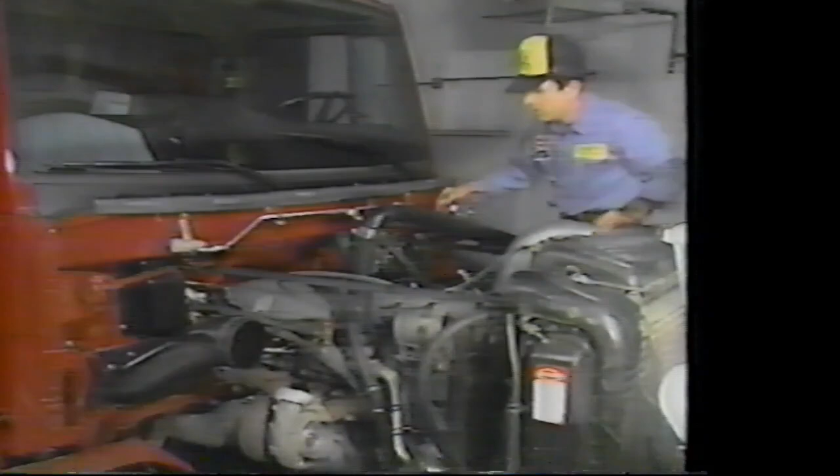Be sure you have the correct model Jake brake, Model 760. The serial number is located on top of each housing. Also be sure you have the following special tools: a 15mm 12-point socket wrench, a 12mm 12-point socket wrench, a 3/16-inch hex key socket wrench, an expander tool, Kent-Moore part number J37347, and an injector height gauge, Kent-Moore part number J35637.

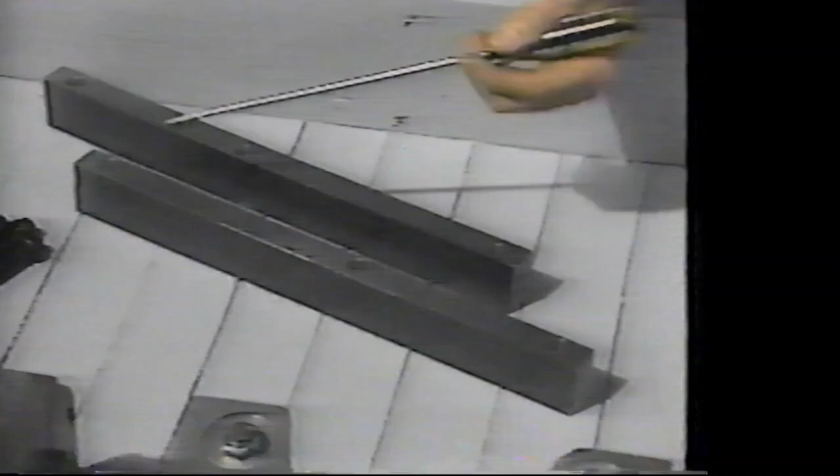You also need the Jacobs installation kit. Parts included in this kit are 3 housings, support bars, cap screws, clutch switch, dash control, module and harnesses, plus the customer information group and Model 760 Jake brake installation manual, and the Detroit Diesel Series 60 engine service manual.

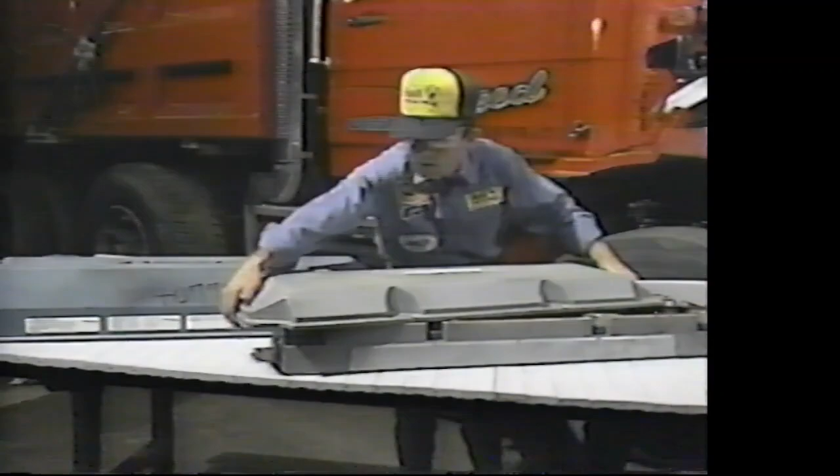There are 3 styles of valve covers for the Series 60 engine: the current aluminum style 2-piece valve cover, the earlier aluminum style 2-piece valve cover, and the fiberglass 1-piece valve cover. However, the aluminum style 2-piece valve cover cap may require modification at the breather pipe location inside for the Jake brake housing clearance. We will refer to this modification at the end of the installation of the engine brake.

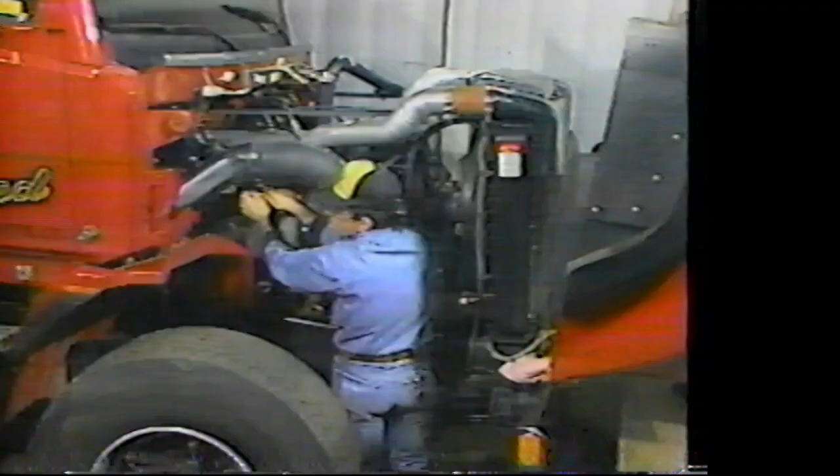All Detroit Diesel Series 60 12.7-liter engines with serial number 6R4455 or higher are Jake brake ready. For engines with serial numbers lower than 6R4455, you need a non-Jake ready engine brake kit. This will be covered towards the end of this program.

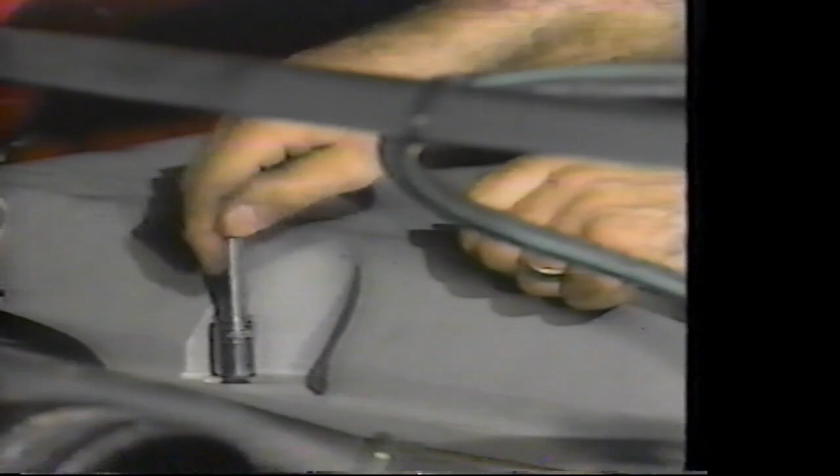Now let's turn to engine preparation. First, steam clean the engine and remove the engine parts necessary for access to the engine overhead. Now remove the valve cover cap. The cover cap on this engine is aluminum, so you do not have to remove the cover base. But for the purpose of this demonstration, we have removed it for better visibility.

On the Jake ready engines, it's not necessary to readjust the engine overhead. The purpose for showing the Detroit Diesel Series 60 valve and injector adjustments is to inform mechanics not familiar with the Series 60 engine, and to have this procedure shown before the Model 760 Jake brake housings are installed on the engine. For non-Jake ready engines, it's necessary to readjust the overhead, as new engine components will be required. The component changes necessary will be covered at the end of this program.

The next section covers valve clearance and injector height adjustments. Accurate adjustment of the clearance between the valve buttons at the end of the rocker arm and the tip of the intake and exhaust valves is important to maximize Jake brake performance and economical engine operation. Likewise, injector height should be measured and adjusted if necessary. Intake and exhaust valve clearance is adjusted by means of an adjusting set screw and lock nut located beneath the valve at the end of the rocker arm.

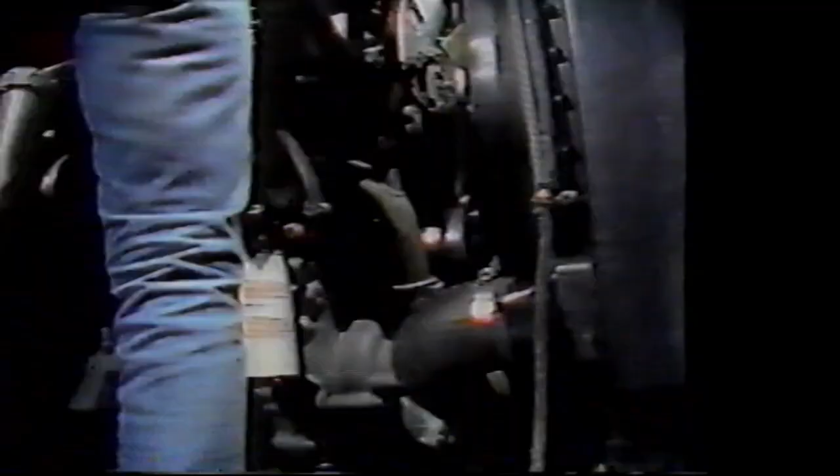To adjust fuel injector height, use the Kent-Moore injector height gauge, part number J35637. Note the gauge hole in the fuel injector body. In the method we will now show, you will have to bar the engine over only 2 complete revolutions. You will adjust 3 cylinders, either valves or injectors, on each revolution. Be sure to first disconnect the starting power for the engine. Do this by removing a battery cable. Do not simply rely on turning off the ignition.

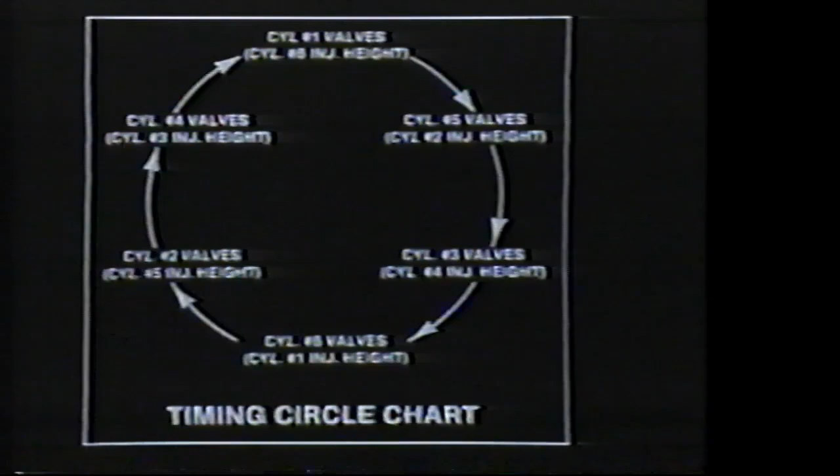First, let's summarize the steps, then we'll take it step by step. You will be using this timing circle chart as a guide. It's shown in the installation manual. Always bar the engine over in the direction of rotation, stopping when one of the fuel injectors has just begun its downward stroke. Note the number of this cylinder and refer to the timing circle chart. You can start the adjusting with any cylinder, but be sure to complete the circle.

Adjust all 4 valves, 2 intake and 2 exhaust, at this cylinder position and set the fuel injector height on the companion cylinder. Never set the valves and injector of the same cylinder at the same time. Continue around the circle until all 6 sets of valves and fuel injectors have been adjusted.

Here's the process step by step. To adjust the intake valves, insert a 0.008 feeler gauge between the tip of the valve stem and the valve button at the end of the rocker arm. Loosen the lock nut and turn the adjusting screw until the feeler gauge produces an even or smooth pull between the valve stem and the valve button.

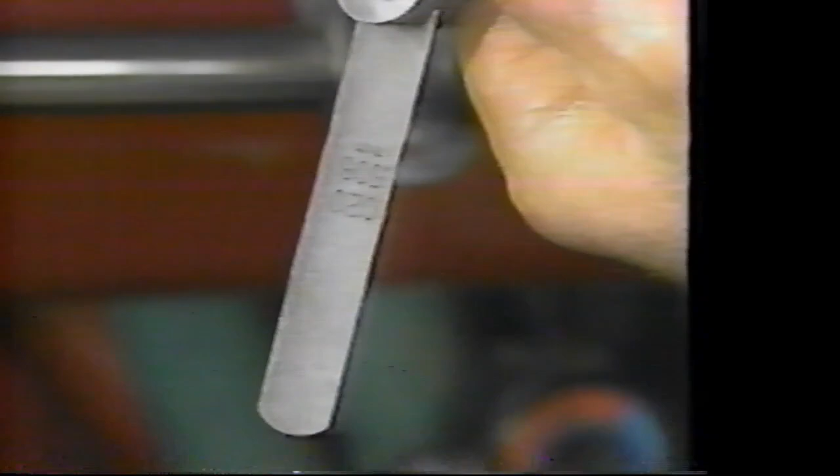Torque the lock nut to 35 foot-pounds. Remove the feeler gauge, then reinsert it to be sure the adjustment did not change when you tightened the lock nut. Readjust the gap if necessary. Adjust the 2 exhaust valves the same way, but use a 0.020 feeler gauge.

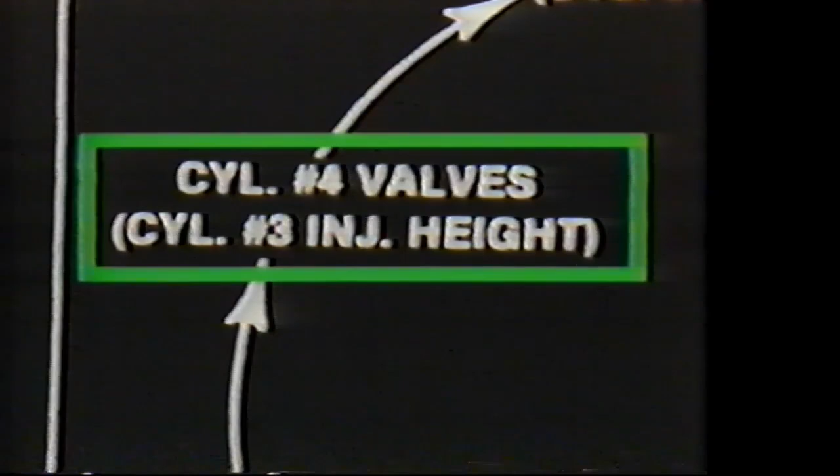Now refer to the timing circle chart. Find the cylinder number for which you just adjusted the valves. The number in parentheses directly below is the cylinder for which you now adjust the fuel injector height. In this demonstration, cylinder number 4 was just adjusted. The chart says to now adjust the fuel injector height for cylinder number 3.

Place the tip of the height gauge in the hole in the fuel injector body with the flat of the gauge towards the fuel injector plunger. Be sure the height gauge seats on the machined surface with the tip in the gauge hole. Dirt or other foreign material in the hole or on the machined surface may prevent accurate setting of the injector height. Loosen the fuel injector rocker arm lock nut.

Then turn the adjusting set screw until the flag of the gauge, that is the extended part of the gauge, will just pass over the top of the injector follower. You will develop an accurate feel for this, and your objective is to adjust all 6 injectors to the same feel. Torque the lock nut to 35 foot-pounds. Then recheck the adjustment with the height gauge and readjust as necessary.

Now bar the engine over until the injector in the next cylinder in the timing circle chart begins its downward movement. Repeat the adjusting process starting with the valves, continuing until you have adjusted all the valves and fuel injectors. To check tolerances, consult the component checking dimension and setting chart in the manual. Now let's return to the steps for installation of the Jake brake.

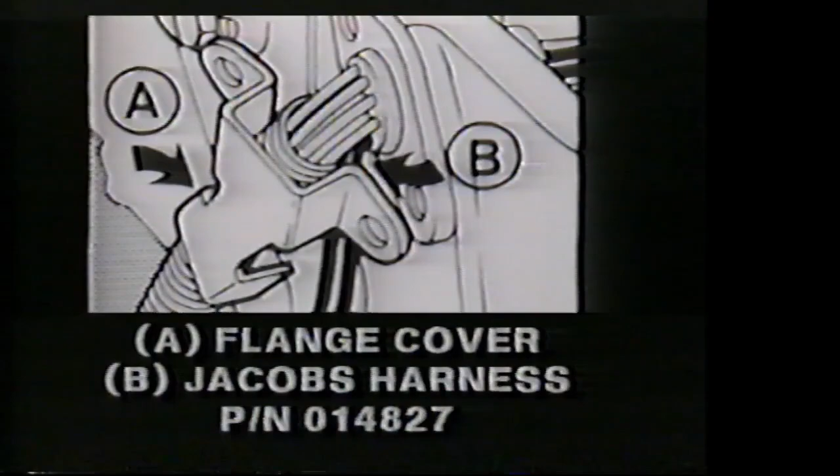Before the support bars and engine brake housings can be installed, the under valve cover wiring harness must be installed first. Remove the mounting flange cover for the electronic unit injector harness. Insert the blue wire and the yellow wire through 2 of the access holes in the grommet located at the rear of the cylinder head. Caution, use care. Once these wires are inserted through the grommet, they cannot be removed because of the terminal locking tangs. So remember to do it right the first time.

Lay the harness alongside the injector wire harness. Pick up the end connector on the outboard side of the standoff at the rear of the cylinder head. Note, however, that if the harness for the Jake brake solenoid valves was factory installed by Detroit Diesel, the wires are red rather than yellow, and the harness installation is not necessary.

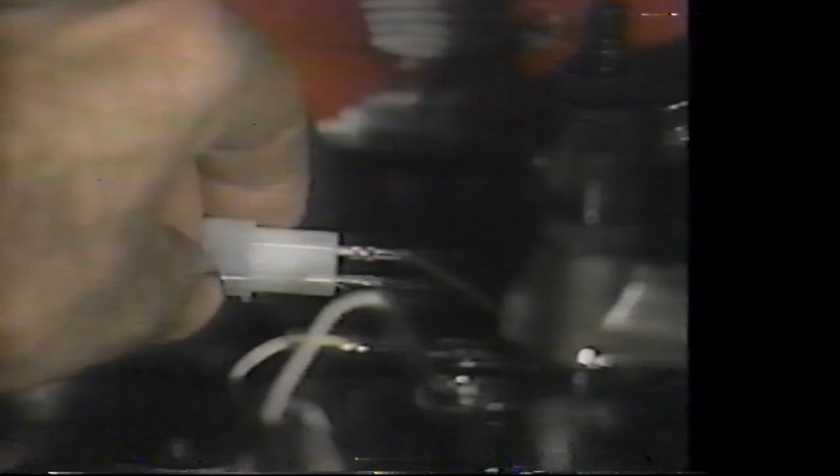Insert the yellow wire from the harness into the pin housing on the same side as the yellow wire on the solenoid harness. Then insert the blue wire into the other hole. Then install the pin housing onto the solenoid harness. It fits onto the connector in only one direction. Push the housing until it clicks. Note the Detroit Diesel factory installed harnesses do not have the pin housing and connector. Caution, the wires must be connected as instructed. If the wires...

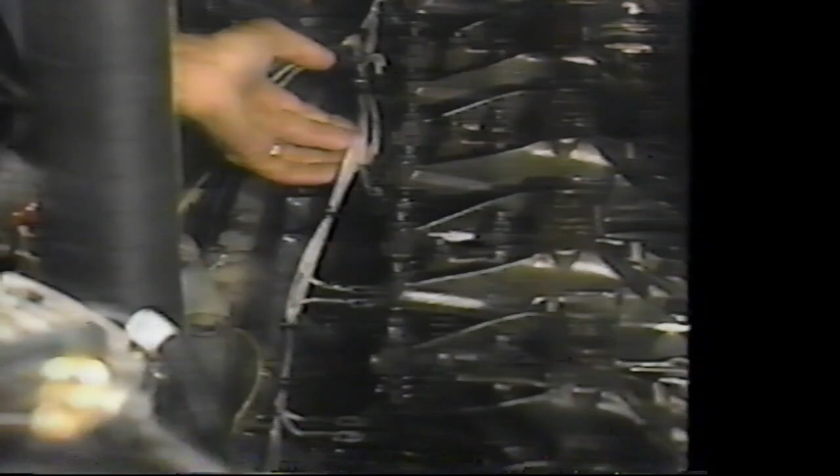Bend all the electrical terminals at the injectors upwards about 90 degrees to provide clearance for the Jake brake housings. Caution, then roll the harness down against the injectors and add loom as needed for support bar installation.

Next, remove the 3 bearing cap bolts on locations 2, 4, and 6. These bolts are not to be used for installing the Jake brake. Discard after removal. Always blow out the oil from the bolt holes, cam bearings, and bosses for the support bars. Please use care when doing this, and remember to be sure to wear eye protection. Warning, eye protection must be worn while blowing the oil. Personal injury may result if safety glasses are not worn.

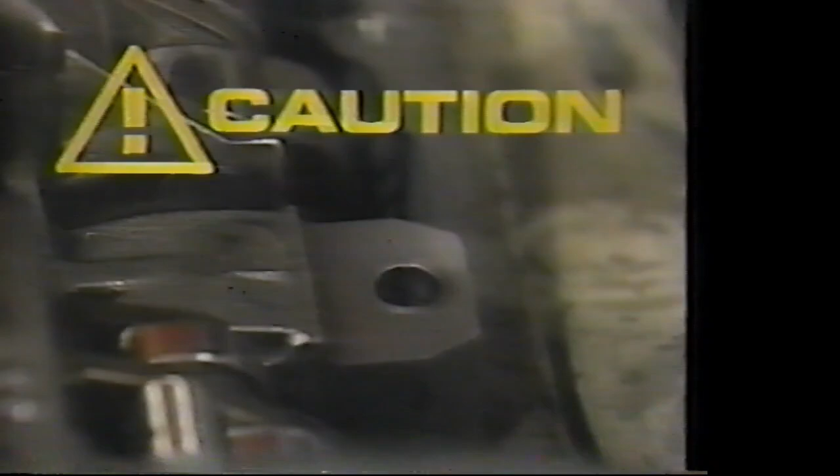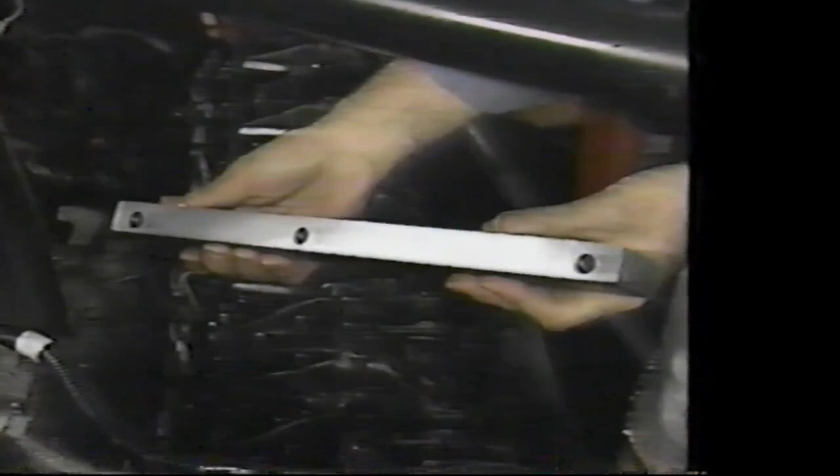Caution, attach a length of tubing to a blowgun nozzle to blow out the oil from the bolt holes. Cover the holes with hand towels to minimize oil spray. Removing the oil from the bolt holes prevents the engine block from cracking when tightening the bolts later. The next step is to install the Jake brake housings, but first you must install the support bars with the out stamp towards the turbocharger side of the engine.

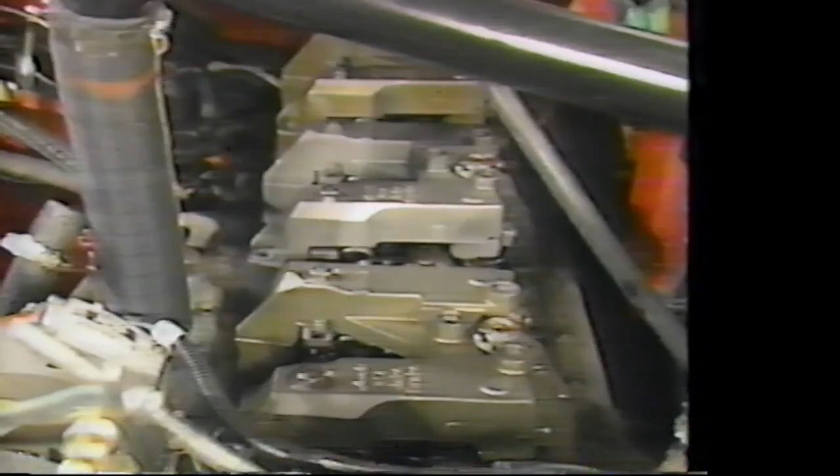Then place the 3 Jake brake housings over the rocker shafts with the solenoid valves towards the camshaft side of the engine. Be sure the housings do not interfere with the wiring harness and align to the support bars. Apply International Compound number 2 to the threads and to the underside of the head of the housing hold-down cap screws.

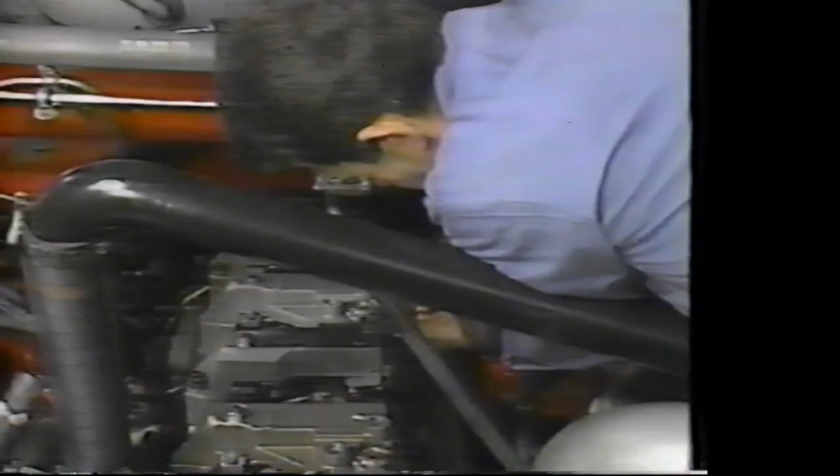Install washers on the 4 3/4 inch long cap screws and insert the screws into the brake housings on the exhaust manifold side. There are 2 such screws per housing. Install a pilot bolt for housing alignment on the camshaft side of the engine.

Next, torque the 6 cap screws on the exhaust manifold side of the engine to 40 foot-pounds and remove the pilot bolt. Then install a washer on the 4 3/8 inch long cap screw and insert it into the brake housing on the camshaft side. There is only 1 such screw per housing.

Tighten the Jake brake hold-down cap screws in the following sequence. Torque the 3 cap screws on the camshaft side of the engine to 40 foot-pounds. Now repeat the torque sequence, but torque all the cap screws to 80 foot-pounds.

The next procedure is adjustment of the slave piston. Caution, the slave piston adjustment procedure must be strictly followed. Failure to use the proper adjustment procedure will result in poor Jake brake performance and/or serious engine damage. You must make the adjustment with the engine stopped and cold. The oil temperature must be 140 degrees Fahrenheit or below.

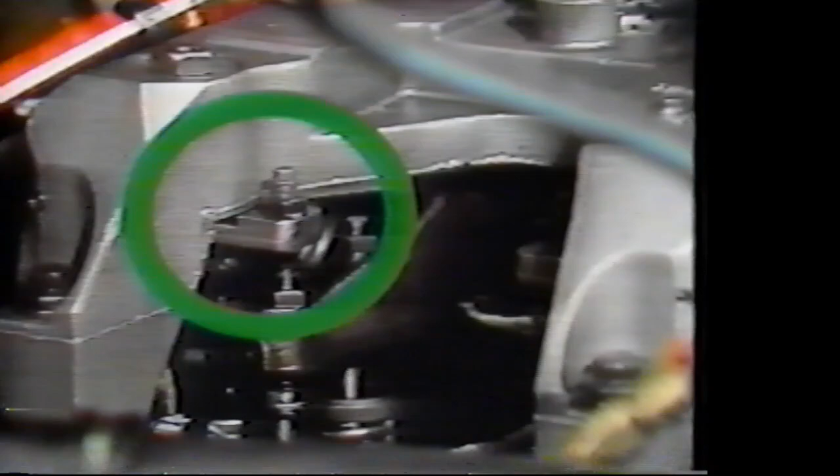Also, the exhaust valves on the cylinder to be adjusted must be in the closed position, that is, with the rocker arm loose. First, note the leveling screw and the crosshead member of the slave piston assembly. Back out the leveling screw until the end of the screw is beneath the surface of the crosshead.

Then place a 20 thousandths feeler gauge between the solid side of the slave piston crosshead, that is, the side without the leveling screw, and the exhaust rocker arm adjusting screw. Now turn the slave piston adjusting screw clockwise until you feel a light drag on the feeler gauge. Holding the screw in this position, torque the lock nut to 25 foot-pounds.

Note that the slave piston adjusting screws are reset screws. You must not disassemble them. For slave piston adjustment on 11.1-liter Detroit diesel engines, refer to the Model 760 installation manual.

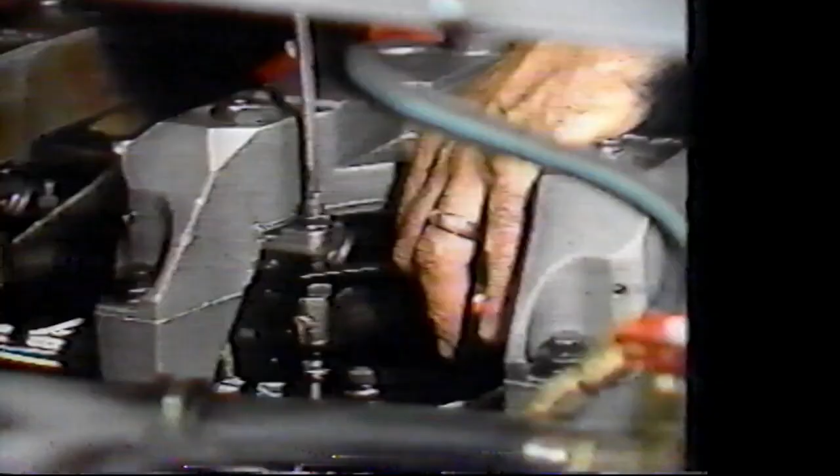Next, follow the same procedure to set a 20 thousandths clearance between the slave piston leveling screw and the rocker arm adjusting screw. As before, torque the lock nut to 25 foot-pounds.

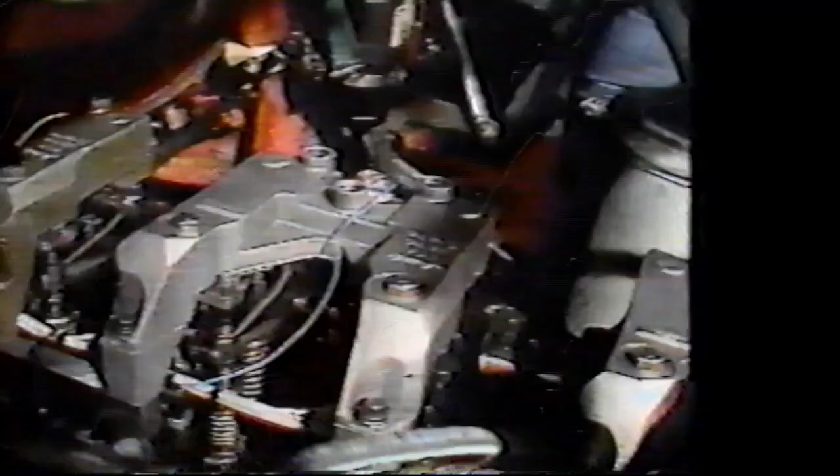Repeat these same steps for the slave piston adjustment on each of the remaining cylinders. Rotate the engine when necessary to put the exhaust valves in the closed position to make the adjustment. The purpose of routing and clipping wires to the support bars is to keep them from rubbing between the support bars and the housing.

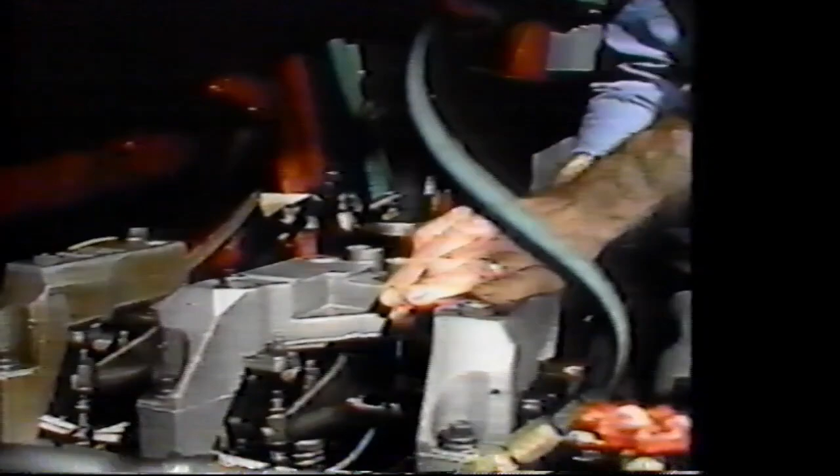Now connect the 3 wires to the solenoid valves as follows. The short yellow wire to the rear housing. The blue wire to the center housing. And the long yellow wire to the front housing. Store any excess wire along the injector wire harness and secure with plastic wire ties.

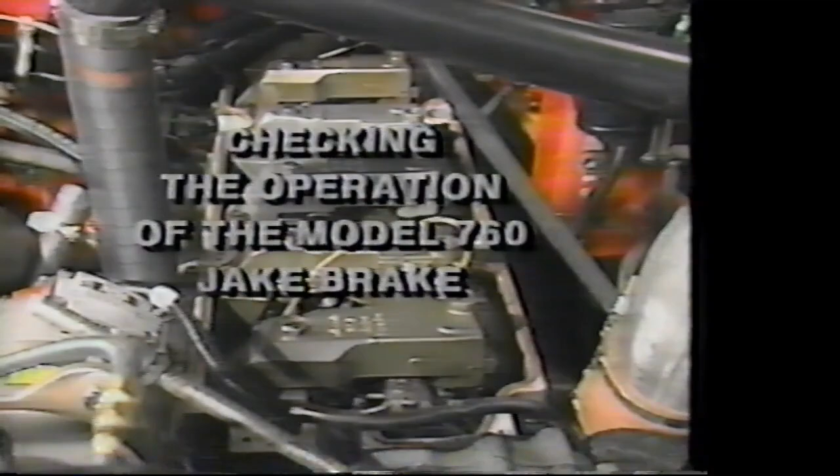The lower cover has been reinstalled for engine brake operation check. The next section of this film shows you how to check the operation of the Model 760 Jake brake. You are again reminded to be careful. Warning, wear eye protection and do not expose your face over the engine area. Take precautions to prevent oil leakage onto the engine.

It is important for you to keep in mind that whenever the engine is running with the valve covers removed, oil splashing in the engine area could cause personal injury. The first step in checking Jake brake operation is to bleed the brake housings. Start the engine and allow it to run for a few minutes. Then depress and release the Jake brake solenoid armature several times to allow the housing to be filled with oil.

Watch the master piston to be sure it is moving down onto the roller in the injector rocker arm. Check each of the 3 Jake brake housings to be sure each is functioning properly. Once you are satisfied, shut down the engine.

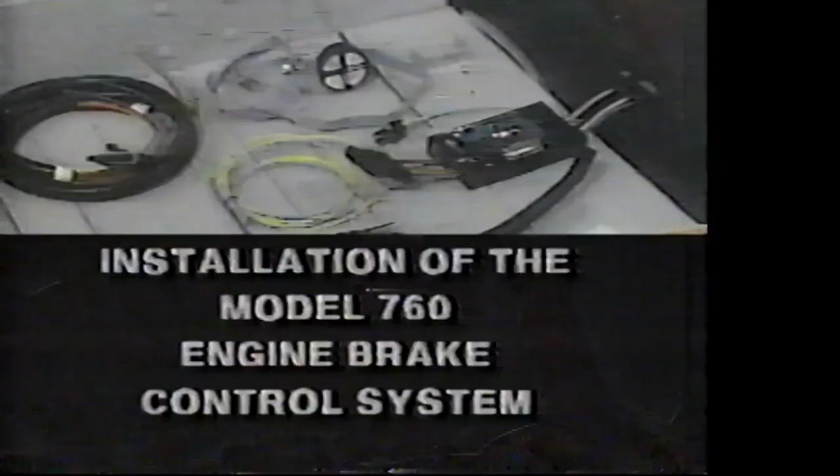The next section of this film shows you how to install the clutch switch. Mount the switch in the most convenient or accessible location possible, which may be under the floor wheel well, in the area of the bell housing, under the dash, or the engine firewall.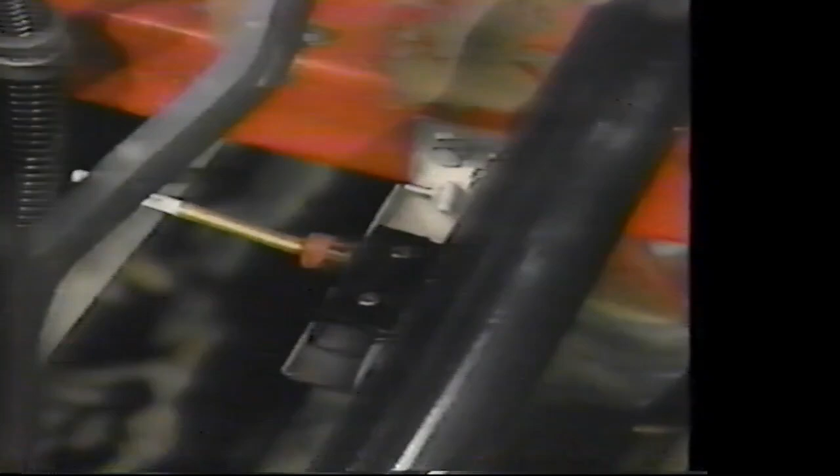After mounting the switch bracket, install the switch with the actuator arm in contact with the clutch pedal arm or other clutch member. Adjust it by moving the switch along the mounting bracket. The tip of the actuator arm should be deflected about 1 to 1.5 inches when the clutch is fully engaged. The switch should click in during the free play motion of the clutch pedal before clutch disengagement occurs.

Here is how you install the dash module. Locate an area on the dash for the dash module and drill a 2-inch hole. Install the module using the bracket and 2 wing nuts. Caution, do not over-tighten the wing nuts. Switch failure will result if you do.

Control module installation. Using 2 self-tapping screws, mount the control module inside the cab so that the ribbon harness will reach the dash module.

Caution, be sure to secure the control module properly. Do not tie wrap the module behind the dash. If you do, the control module will be stressed and failure will result. This control schematic diagram appears in your Model 760 Jake Brake installation manual. Study it as you proceed with the wiring.

If your installation is using the two optional dash switches instead of the dash module, connect them as shown in the wiring diagram in the installation manual. Note that the use of these switches eliminates the diagnostic troubleshooting feature of the standard circuit.

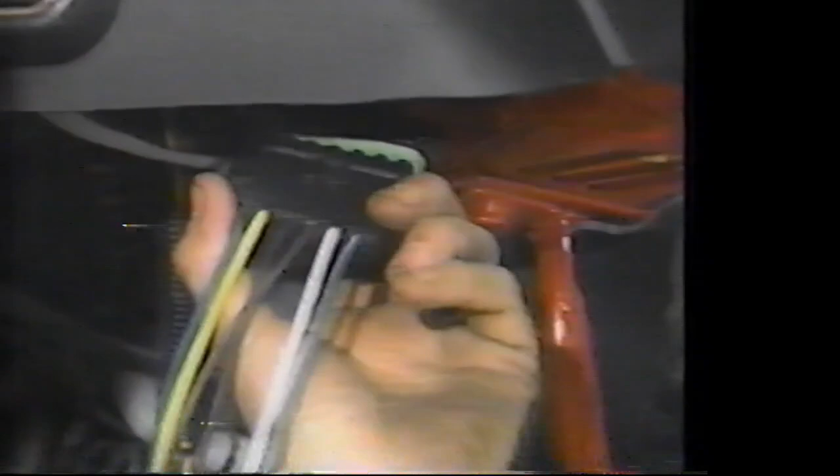Connect the wire harness, part number 015708, to the Weather Pack connector on the control module. Now connect wire harness part number 015709 to the control module. Connect the green wire to a good ground. The green and yellow wire is for possible future use. For now, connect it to the same ground with the green wire.

Warning: it is very important that the green wire be connected to a good ground. Attach it to a chassis bolt, not a cab bolt or a dash screw. A poor ground will cause intermittent Jake Brake operation and damage to the control module. Connect the red wire to a 10-amp circuit breaker that is controlled by the ignition key.

For standard transmissions, the blue and white wire are not used. Insulate the ends and store the wire. For automatic transmissions, connect the wire to the ATEC wire number 211. The orange wire is also for future use. Insulate and store it. Connect the white wire and the black wire to the clutch switch.

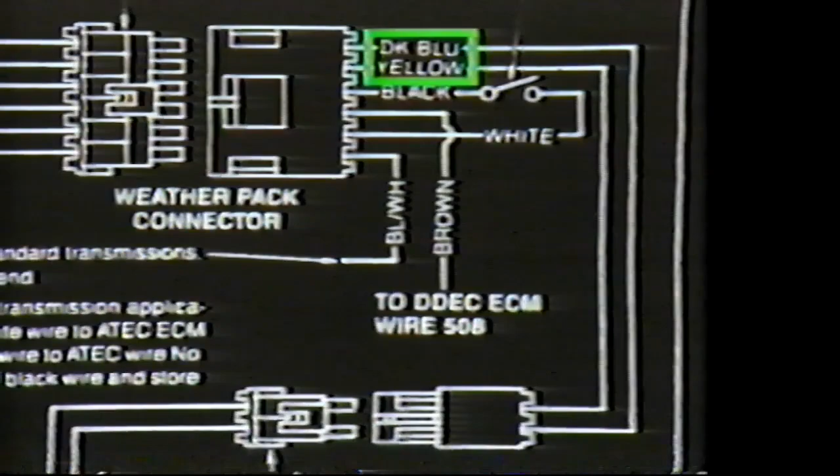Connect the dark blue wire and the yellow wire to the shroud, which connects to the solenoid external harness, part number 014827. As you recall, you installed that harness earlier as the first step in preparing the engine. To complete the installation, be sure to connect the brown wire of the harness to the DDEC ECM wire 508.

Next, we check the control system. To check the system, turn the ignition switch back on, but do not start the engine. The red light on the dash module indicates that the control module is off. To turn the control module on, press the on-off button on the dash module. The red light goes off and the green light in the lower quadrant comes on.

This indicates that only the center housing of the Jake Brake is operational. That is, only 2 cylinders are available to provide retarding power. Pressing the medium button makes its green light go on. Now the center housing is not operational, but the front and rear housings, 4 cylinders, are. Pressing the high button brings on the high green light to show all 6 cylinders are operational to provide maximum

retarding power. To put the control module in the electronic diagnostic mode, press the high button for at least 5 seconds. All 4 lights will start blinking. When they stop blinking, the module is in the diagnostic mode and the Jake Brake solenoids are disabled. Now start the engine. Rev up the engine and release the throttle.

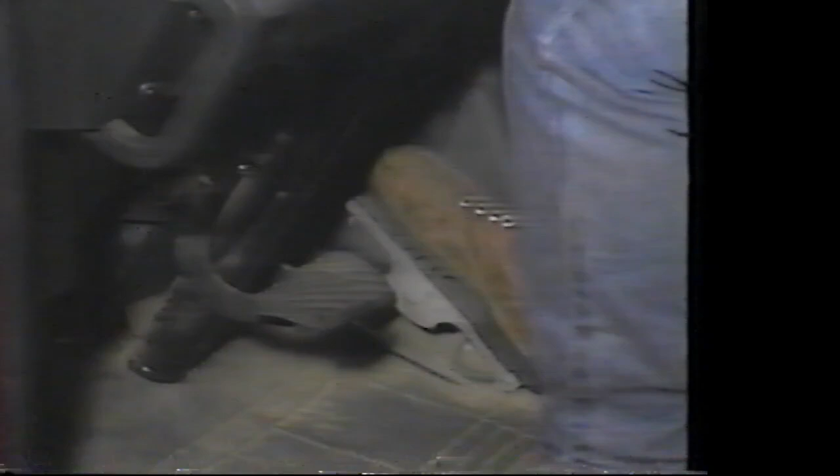The red light will come on, indicating that the DDEC ECM is sending the correct signal for the retarder to turn on. All 4 small lights on mean that you have proper Jake Brake control operation. When you depress the clutch switch, the small light in the high sector goes off. This completes your control system check. Turn off the Jake Brake by pushing the on-off button, then switch off the engine.

760 electronic control module. Quick reference for diagnostics and troubleshooting. When the on-off indicator light is illuminated, there is a retarder enable signal coming from the ECM wire 508. When the low indicator light is illuminated, the green-yellow wire is grounded. When the medium indicator light is illuminated, the orange wire is not grounded. When the high indicator light is illuminated, the clutch pedal is not depressed.

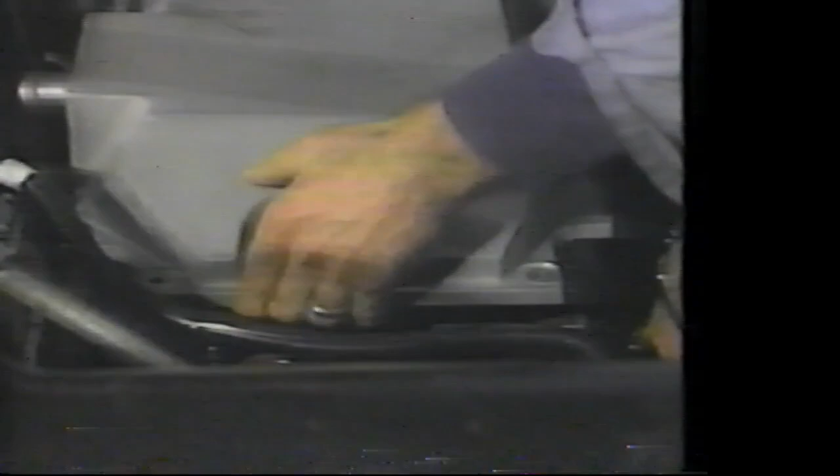Having completed your check, you may now install the aluminum valve cover cap. If you are using either of the other 2 cover caps, refer to the manual for instructions. When you put the valve cover cap on the base, check for any interference between the front Jake Brake housing and the cover cap at the breather pipe location.

If interference exists, take the cover cap off and grind it per Detroit Diesel instructions. Insert the 8 screws. Torque the 8 screws to only 10 foot-pounds in the sequence shown in this diagram in your manual.

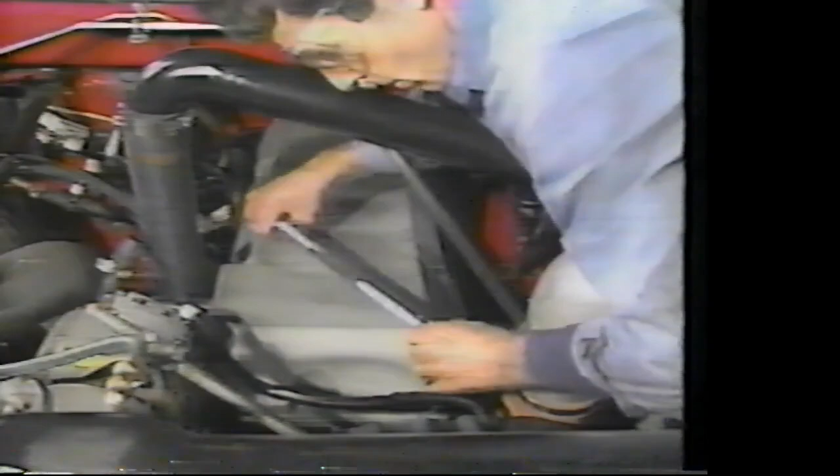Then repeat this tightening sequence, torquing each screw to 20 foot-pounds. The Jake brake is now ready for service. To complete the installation, be sure to fill out the Model 760 warranty card.

The next section of this film shows you how to perform maintenance on the Model 760 Jake brake. The Jake brake is relatively trouble-free. It needs little maintenance. However, inspections and part replacements are needed from time to time. The procedures discussed now will help you keep the Jake brake in top condition. You will see here how to properly remove, clean, and reinstall Jake brake components.

Use an OSHA-approved solvent when washing parts. Be sure to coat parts with clean engine oil when reinstalling them. Warning, never remove any Jake brake component with the engine running. Personal injury may result. This is a diagram of Model 760 Jake brake. It appears in the installation manual. Have your manual handy as you perform maintenance, as this diagram will be helpful.

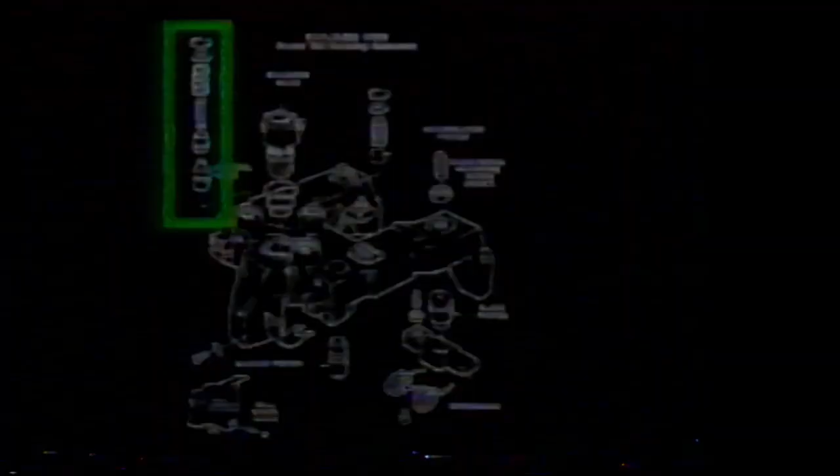The two control valves are the first items on the Jake brake that you remove for maintenance. Warning, remove control valve covers carefully. Control valve covers are under load from the control valve springs. Remove with care to avoid personal injury, and always wear safety glasses. For simplicity, only one control valve is highlighted on this diagram.

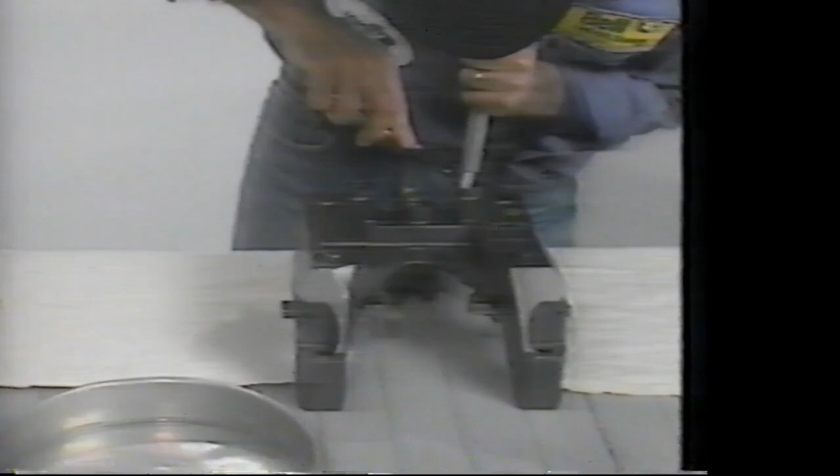You start by removing the control valve cover, which is held in place by the retaining ring shown at the top of the diagram. Press down on the control valve cover with a rod or other blunt tool to relieve spring pressure and remove the retaining ring using retaining ring pliers. You may have to rotate the ring to bring its ears into position. Now slowly let up your pressure on the control valve cover until you feel the spring pressure relieved. Then remove the cover, the two control valve springs, and the collar.

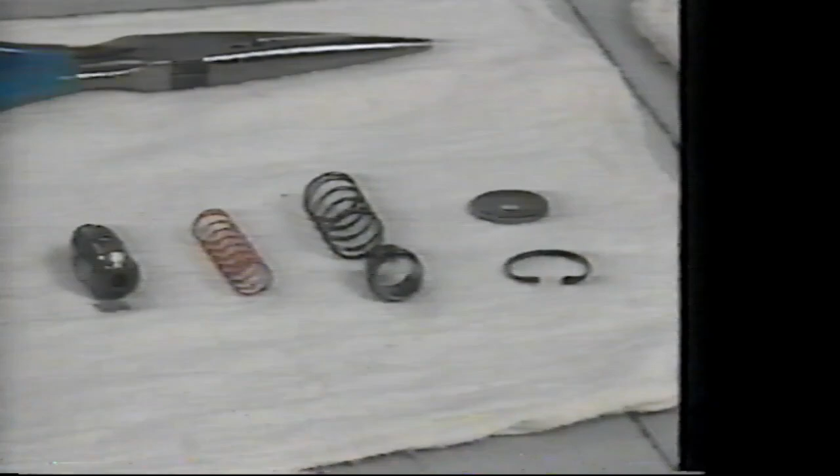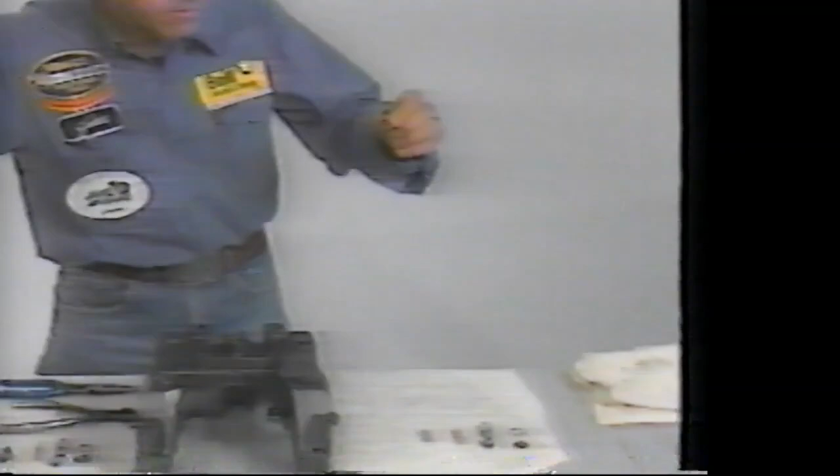Using needle nose pliers, reach into the bore and grasp the stem of the control valve and pull the valve out. We are now finishing the removal of the second control valve. Wash the valve with OSHA-approved cleaning solvent. Then push a wire through the hole in the base of the valve to the distance required to ensure that the ball inside moves freely. The ball should lift with light pressure on the wire. If it is stuck, the control valve should be replaced.

Now dry the valve with compressed air and wipe it clean with a paper towel or lint-free shop towel. Never use rags, as they may leave lint and other residue which can interfere with control valve operation. Thoroughly clean the control valve bore in the Jake brake housing, also using clean paper towels or lint-free shop towels. Lubricate the control valve with clean oil. Then, holding it by its stem, let it drop into its bore. If binding occurs and it does not drop in smoothly, the control valve should be replaced.

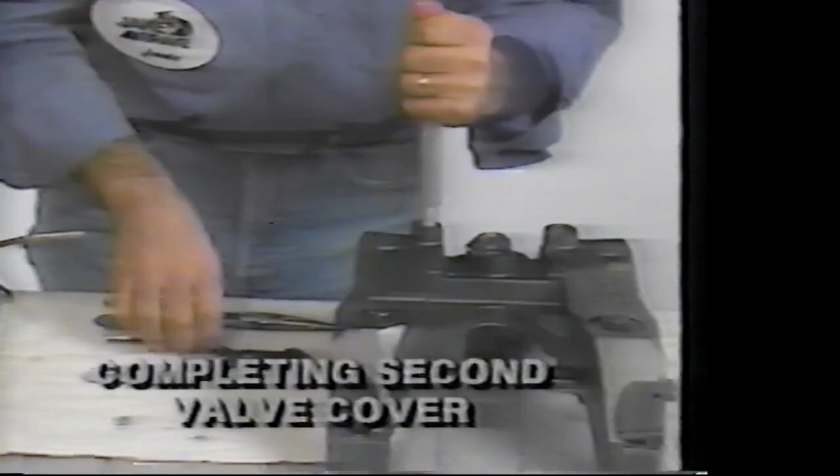Lubricate the collar, then making sure that the longer sleeve area on the collar is up, insert it into the bore. Insert the two springs and place the cover on the top spring. Then slide the ring over the rod and press the rod down on the cover until you can insert the retaining ring. Now repeat the same procedure for the other control valve in the housing. This completes work on the control valves.

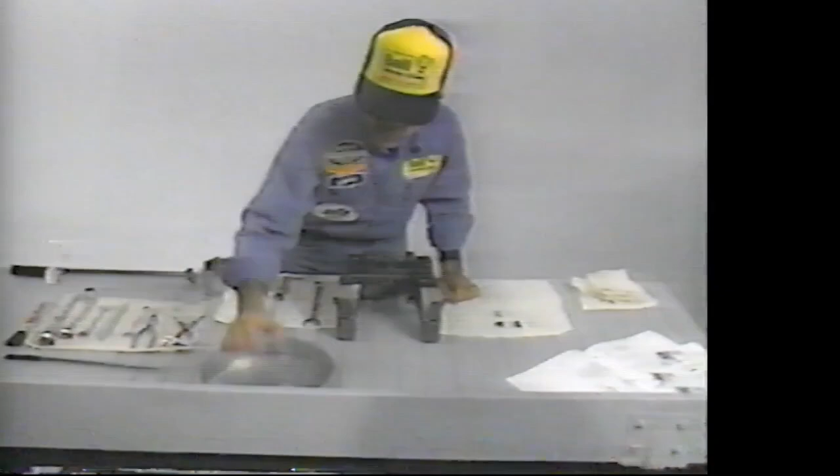Actuate the plunger on the bottom of the screw using a small screwdriver. The plunger should protrude from the bottom of the screw. It should have light spring pressure when depressed and should move freely. Also check the retaining ring to be sure it is fully engaged in its groove. Caution, do not adjust or tamper with the adjusting screw assembly. Engine damage could result. Caution, do not use auto lash adjusting screws or solid screws in Model 760 Jake brakes.

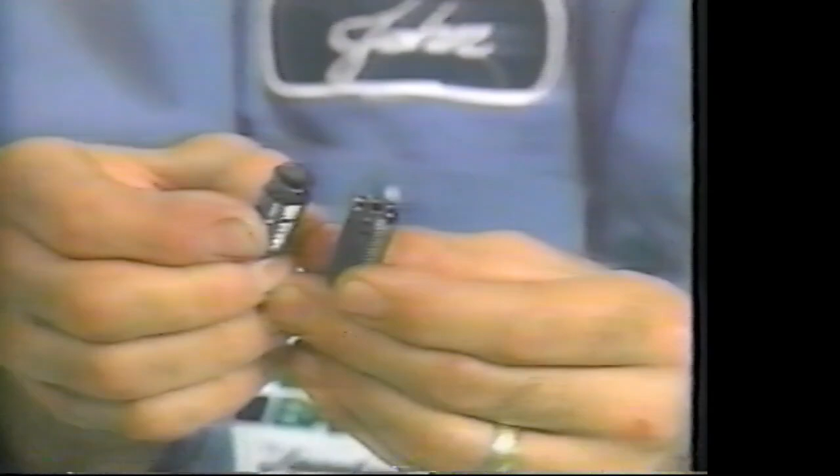The Model 760 slave piston adjusting screws, reset, are not the same as those used in other Jake brake models. For proper identification, refer to the Model 760 parts manual. The part number is stamped on the top of the adjusting screw. Use of other than Jacobs recommended parts may result in engine damage. Be sure to use the correct replacement. It looks like the one on the left, not like the Jacobs auto lash screw on the right. When you inspect the adjusting screws, if you find any defect, replace the entire assembly. Lubricate and reinstall the adjusting screw.

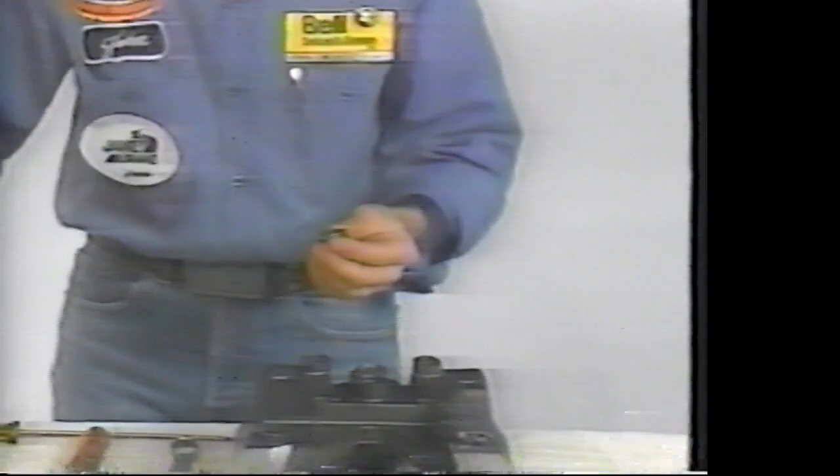Then snug down the lock nut. You will make the final adjustment using the adjusting screw when the engine brake housing is reinstalled on the engine.

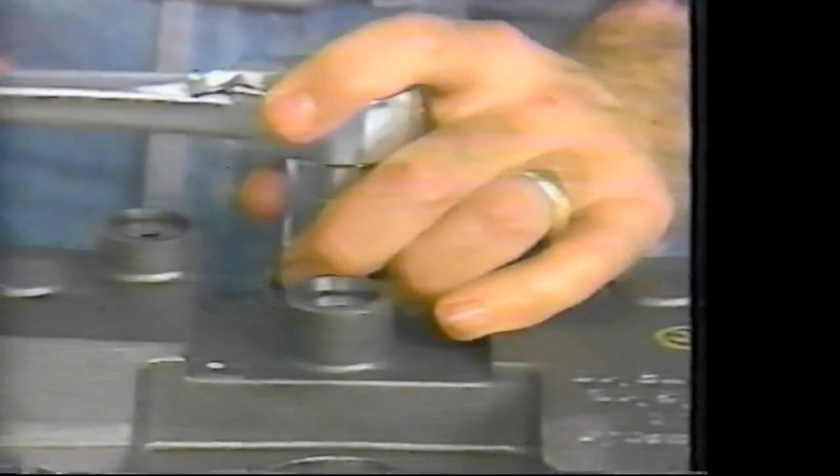Caution, do not disassemble or tamper with the solenoid valve itself. Engine damage could result. Wash out the solenoid valve with an approved cleaning solvent. Use a brush to clean the oil screen. After brushing the screen clean, dry the valve with compressed air, and be sure you are wearing eye protection.

Clean out the solenoid valve bore in the housing using clean paper towels or lint-free shop towels. Never use rags, as they may leave lint and residue which can plug the oil passageways. Lubricate a new set of 3 solenoid seal rings. Install the upper and center rings on the solenoid body. Insert the lower seal ring into the bottom of the solenoid bore. Use a wire to make sure it's seated properly.

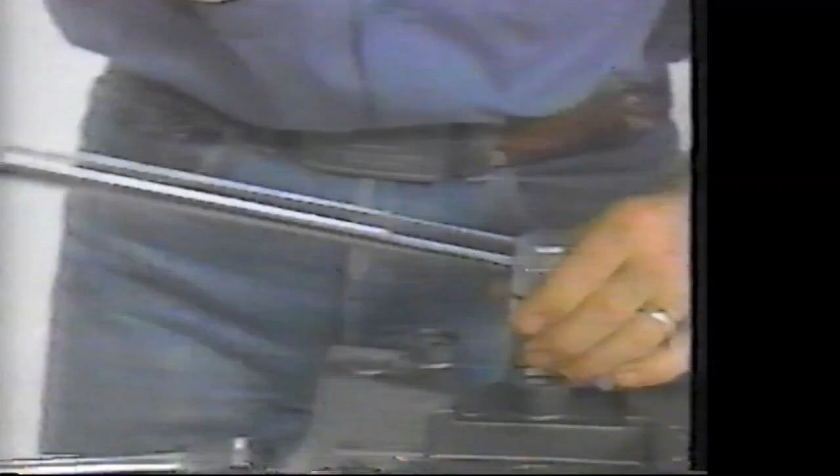Be sure the other 2 seals on the valve body are in proper position. Then carefully screw the solenoid valve into the housing without disturbing the positions of the seals. Bring the valve up snug, being careful not to twist the seals. Torque the valve to 4 to 6 foot-pounds. This completes solenoid valve maintenance.

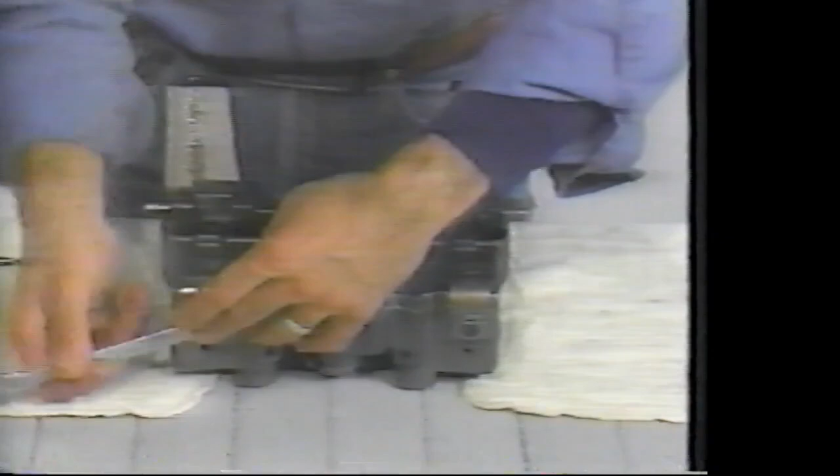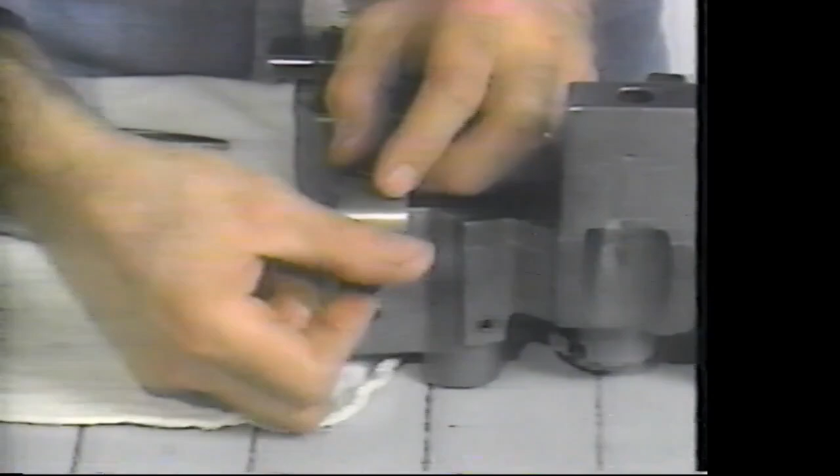Lubricate the master piston and reinsert it in its bore. Then place the spring in position, making sure its legs are centered around the piston boss. With the washer on the screw, bring the screw up snug. Torque the screw to 100 inch-pounds. Then repeat the procedure for the other master piston.

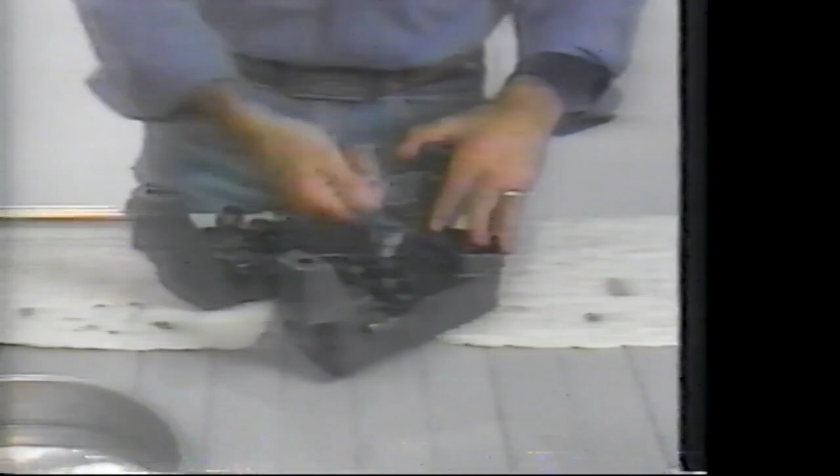The slave piston is the next part of the Jake brake you should work on. The parts are highlighted here. Turn the housing upside down and using a hex wrench back out the screw. The screw is under spring tension when you first loosen it, so be careful. Remove the spring that retains the slave piston assembly and set it and the spring aside. Remove the crosshead, loosen the leveling screw lock nut, and back out the leveling screw from the crosshead. Then remove the slave piston from its bore. Inspect all the components for excessive wear or damage and replace parts if necessary.

Lubricate the parts and reinstall them, beginning with the slave piston. Be sure to install the crosshead with the leveling screw towards the center of the housing and the part number away from the housing so that it is visible. Install the slave piston assembly retaining spring with the ends over the crosshead. Insert the screw through the center part of the spring, engage the threads, and tighten the screw snug.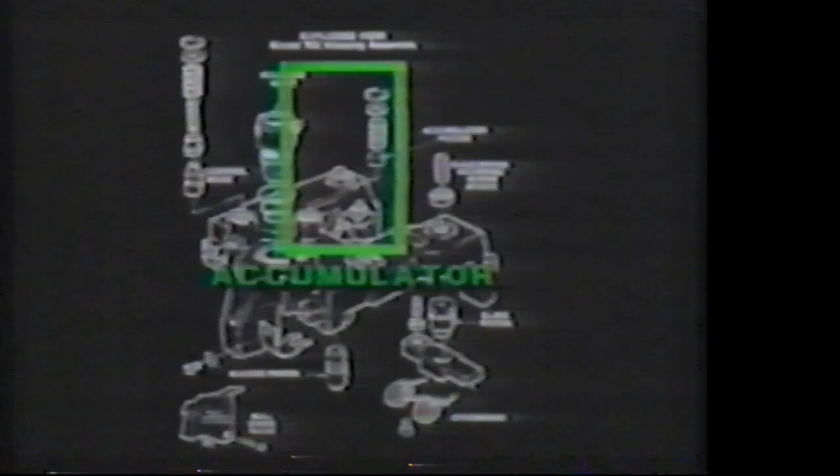The accumulator is the next item in the maintenance program. Caution! The accumulator spring is under strong compression. Use caution when removing the retaining ring and cover. Wear safety glasses. If the spring is accidentally discharged, personal injury may result. The accumulator, its piston, and other components are highlighted here. The first step involves removing the spring.

While pressing down on the accumulator cover with a rod to relieve the spring pressure on the retaining ring, remove the ring using retaining ring pliers. Now slowly let up your pressure on the accumulator cover until you feel the spring pressure relieved. Then remove the cover and the spring. Use a magnet to remove the piston from the accumulator bore. Inspect the piston and other parts for wear or damage.

Replace them if necessary. Lubricate the parts and reassemble them, beginning by inserting the piston in the bore, then the spring. Now press down on the cover and insert the retaining ring. Work carefully to prevent the rod from sliding off the cover and possibly causing release of spring tension. Be sure to rotate the ring about 90 degrees after you insert it. This completes the work on the accumulator.

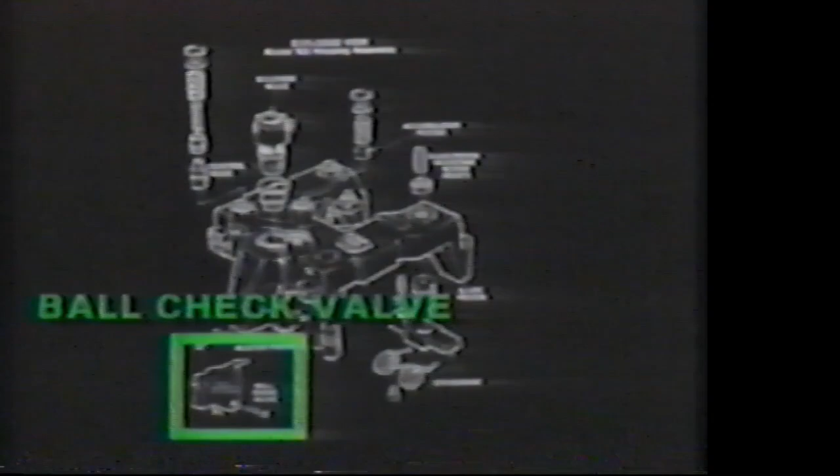The final item of maintenance on the Jake brake itself is the ball check valve. It's on the front underside of the brake housing, in this location. Use a hex wrench to unscrew the plug and remove the spring and the ball by letting them drop into your hand. Check the parts and replace any showing excessive wear.

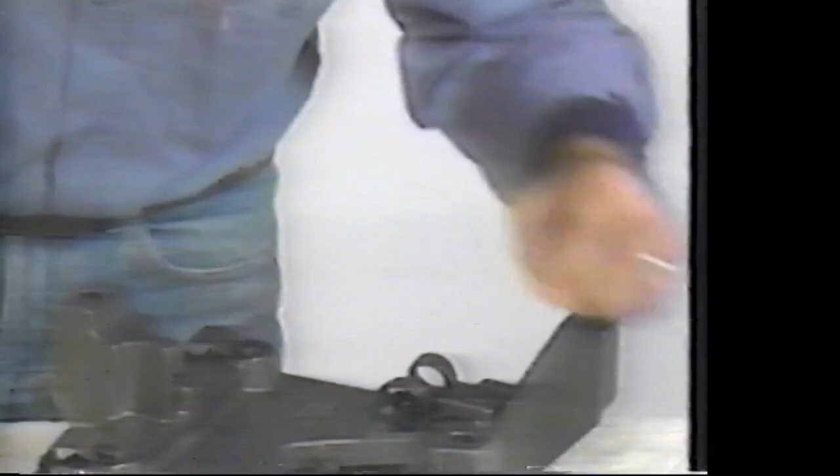Then lubricate them. Reassemble the parts and screw the plug down hand tight. With this work done, you have completed the maintenance work on the Jake brake housing.

The next section covers maintenance performed on the master piston pin and roller. The injector rocker arm contains a pin and roller for actuating the Jake brake master piston. If the roller is excessively worn or damaged, the injector rocker arm must be replaced. Pins and rollers are not available as service parts. Injector rocker arm assemblies are available from Detroit Diesel.

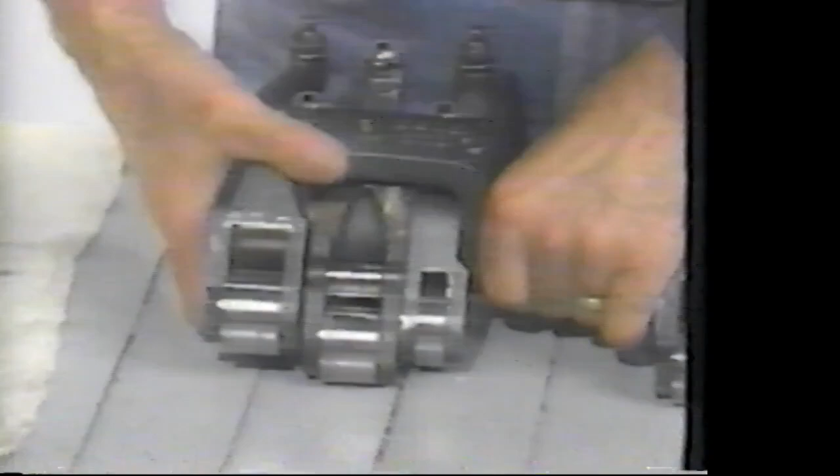Slide the rockers off the shaft. Wipe off the rocker arm roller assemblies by blowing them with compressed air, and be sure to wear eye protection. Disassemble the rocker arm shaft. Lay out each piece to help you reassemble them.

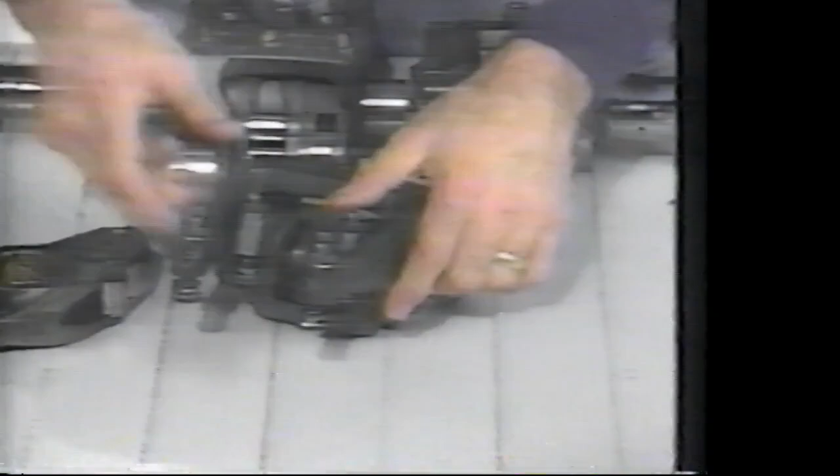Replace the injector arm with a new part. Remember that pins and rollers are not available from Jacobs as service parts. Injector rocker arm assemblies are available from Detroit Diesel with pins and rollers already installed. Reassemble the parts to the rocker shaft. Now the shaft is ready to be reinstalled on the engine. Note, be sure to reassemble rocker arms to the same position on the rocker shaft.

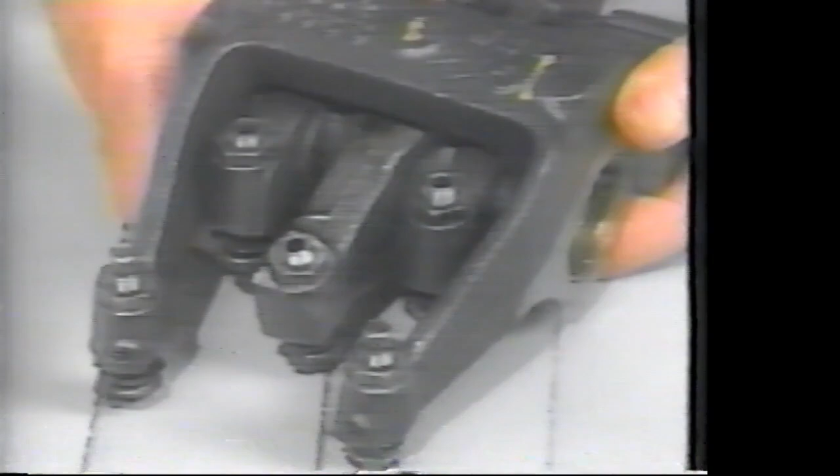Engines built prior to number 6R4455 have 5 8929607 internal hex screws. You must replace the exhaust position screws with number 8929751 external hex screws to provide a bearing surface for the Jake brake.

Some engines built after number 6R4455 have 5 8929751 external screws. You must replace the intake position screws with number 8929607 internal hex screws to increase clearance.

Later engines are built with the correct screws for a Jake brake: 2 part number 8929607 screws in the intake position and 2 part number 8929751 screws in the exhaust position. The injector can use either screw in a non-Jake brake application.

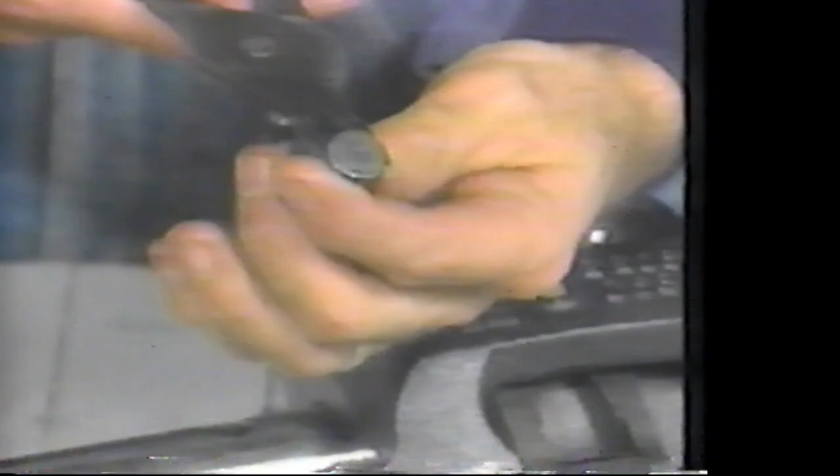Next, check the valve button and valve button retaining clip. To do this, you have to remove the valve adjuster screw from the rocker arm. You remove the screw by spreading the retaining clip with an expander and removing the button. The expander is part number J37347. Jacobs does not, however, provide replacement adjustment screws. They are available from Detroit Diesel Corporation.

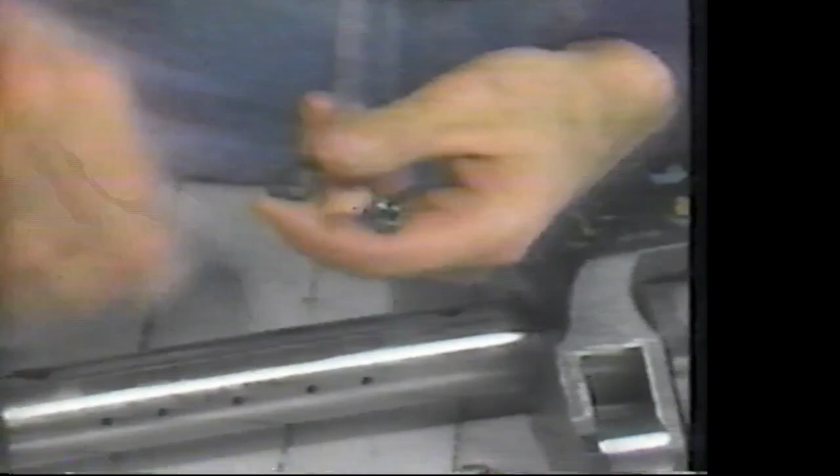First, adjust the expander to limit the amount of travel of the valve button retaining clip to not more than 15.5 millimeters or 610 thousandths. Slide the retaining clip open end first down the adjuster screw. You have to spread the clip slightly with the expander so that the open end can pass over the ball head of the adjuster screw.

Insert the groove on the valve button into the legs of the retaining clip. Remove the expander and hold the legs of the retainer with your thumb and index finger. Press the valve button towards the screw to seat both legs of the retainer completely in the groove. Reinstall the screw in the rocker arm assembly and slide the assembly back onto the rocker arm shaft. Now you can install the rocker shaft assembly back on the engine. This completes the maintenance portion of this program.

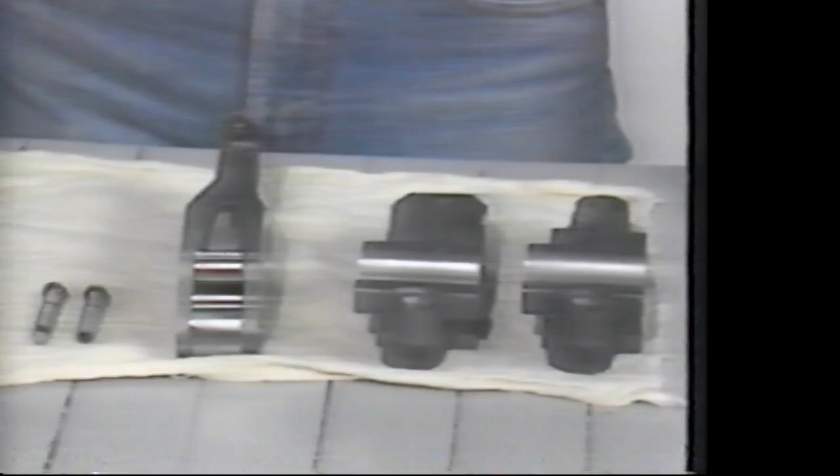We will now discuss non-Jake brake ready engines. For non-Jake brake ready engines, there are several important points for you to keep in mind. Series 60 12.7 liter Detroit Diesel engines with serial numbers lower than 6R4455 will not be equipped with parts required for Jake brake installation. The following parts must be replaced before you install the Jake brake.

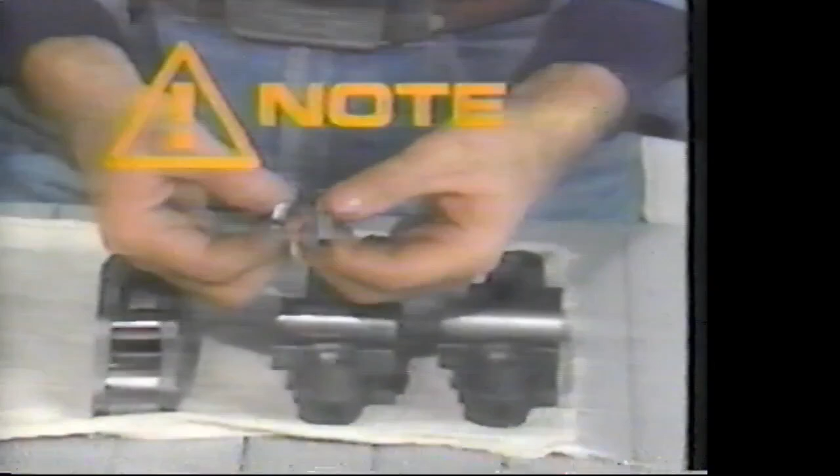Note, the exhaust rocker arm adjusting screws must have the rounded top surface shown on the left for slave piston crosshead contact. The injector rocker arms must have pins and rollers to operate the master piston. They are factory installed by Detroit Diesel. The camshaft bearing caps have a larger pad area in order to support the Jake brake housing. The procedure for the new cam bearing cap is done by line boring. Consult your local Detroit Diesel distributor.

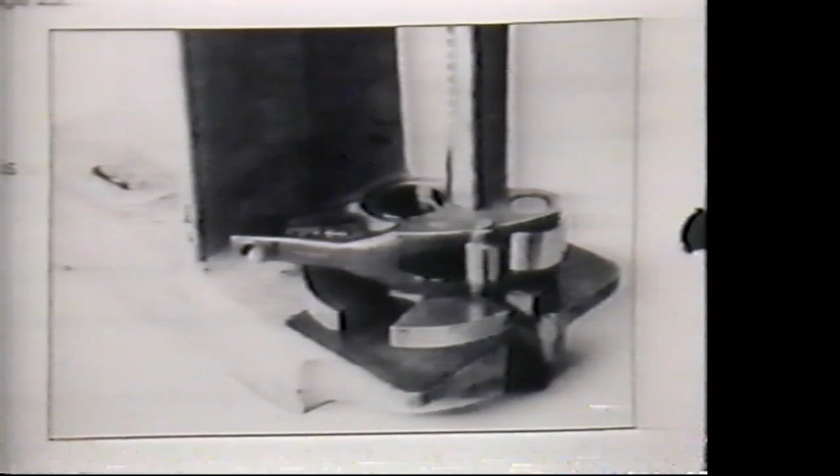To install these various parts, you have to remove the rocker arm assemblies as previously demonstrated in this film. To install the pins and rollers into the injector rocker arms, use an arbor press. Press the pin so that it is flush with the rocker arm on both ends. The pin can be pressed into the rocker arm one time only. If replacement of the pin or roller becomes necessary, the rocker arm assembly must be replaced.

You paid close attention to detail when installing and maintaining the Jake brake. You checked each step. As a result, you have given the truck a powerful retarding device for keeping the vehicle under control, and you have given the driver increased confidence. You can now take satisfaction in a job well done.